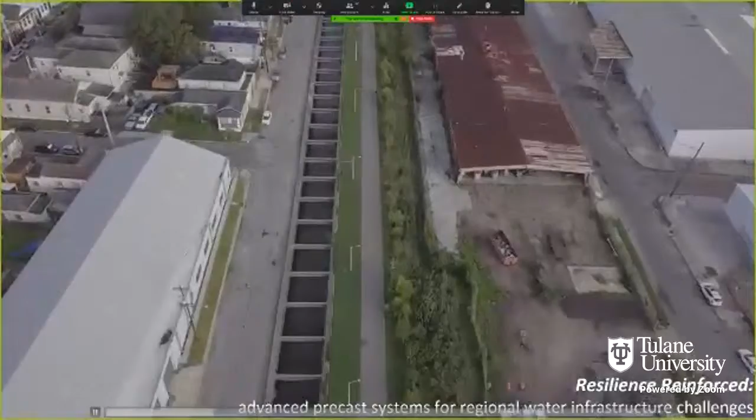Okay, so let me get this going here, and I'll share a screen. One thing is, when I share a screen, for some reason everybody, the video screen essentially is gone, so I can't see you guys, but bear with me. Can you see the moving image? Yes, yes, yeah, good, thank you. Okay, so it's a drone image of the site, but we'll move on here.

Everyone, thank you for joining us for session 2, the afternoon session. Our critics today in the afternoon are Patty Heyda, Associate Professor at WashU. Patty is first and foremost our alum and an urban designer, architect, artist, educator, and author. She studies politics and design in American cities with a focus on contemporary erasure urbanism, displacement, and the normalized processes reproducing intense inequity. Patty's scholarship fuses creative drawing, mapping, and formal design practices with planning, history, critical urban theory, law, and political economy to depict sites according to the reality of forces shaping them. So Patty, thanks for joining us. Thank you, you didn't have to read all that, but it's really nice to have you. And I think it gives everybody the background of why you're here and what kind of things you may be discussing.

So next up is Kevin Centani, Board of Directors at Friends of the Lafitte Greenway. Friends of the Lafitte Greenway is a community-driven nonprofit organization that works in partnership with the city and the community to ensure the Greenway develops into a safe, vibrant, and active park. Kevin is also an entrepreneur, inventor, and hobbyist. For 25 years his company, Controlled Entropy, has designed and produced hundreds of interactive experiences, museum exhibits, trade show displays, and electronic gadgets for clients worldwide. Kevin also has interests including industrial archaeology, New Orleans history, pinball, trains, and infrastructure. Kevin, thank you so much for joining us.

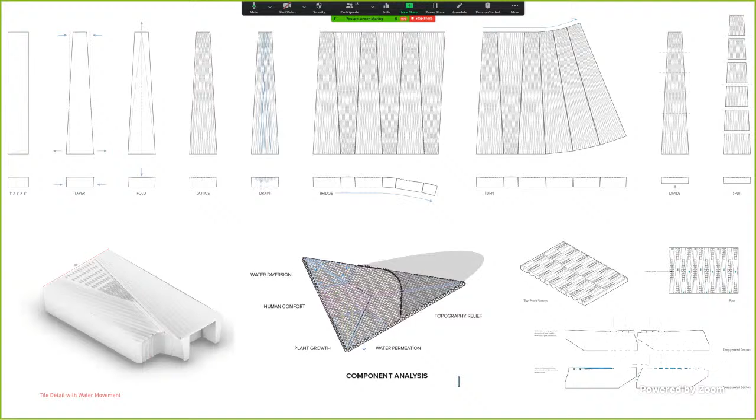I prepared a quick introduction to the studio. Our hunch is that through advanced design and fabrication techniques, the surface geometry of the precast system can be performatively and aesthetically aligned to the flow characteristics of water, mitigating flood and encouraging productive occupation of the ground plane. So at the component scale, the studio pushes the limits of the complex surface geometry that advanced fabrication techniques can afford, and its performative response relative to water.

Now, we've also been looking at the larger context, searching for opportunities to make an urban scale impact. One key data point here in New Orleans: on average, we get about half an inch of rain over 24 hours every 3 days or so.

So the obvious response to the frequent flood events is to, one, increase the size of the drainage system to move more water quickly, or decrease the peak demand of the drainage system by increasing the water detention capacity.

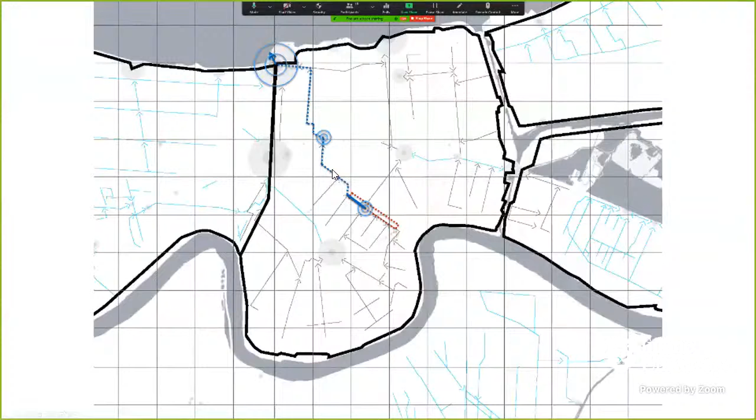The studio took the latter approach this semester with the help of our stormwater management expert, Brooke Morris, who joined us in the morning. We looked at the impact of diverting high flow stormwater from the St. Louis Drainage Canal and detaining it in the northern one-third of the Lafitte Greenway by controlled flooding.

I don't think I need to explain the diagram, but this line in red is our site, so to speak. The canal's right next to it. We're looking towards downtown St. Louis cathedral here, with CBDs in this area. The SWMM model, stormwater management model simulation and analysis, confirms a significant reduction of flooding upstream in the CBD and Lower Garden districts if we take this approach.

Based on the analysis, approximately 450,000 cubic feet of stormwater needs to be diverted and detained to have an impact. This is equivalent to a 1-foot excavation across the site, since the site we're looking at is exactly around 450,000 square feet.

As an example, with a cut and fill strategy, it translates roughly to a 3-foot excavation across one-third of the site, and a 1.5-foot fill across two-thirds of the site. Note that the water table is high here, at 4 feet 6 inches below grade, and the soil is highly impervious.

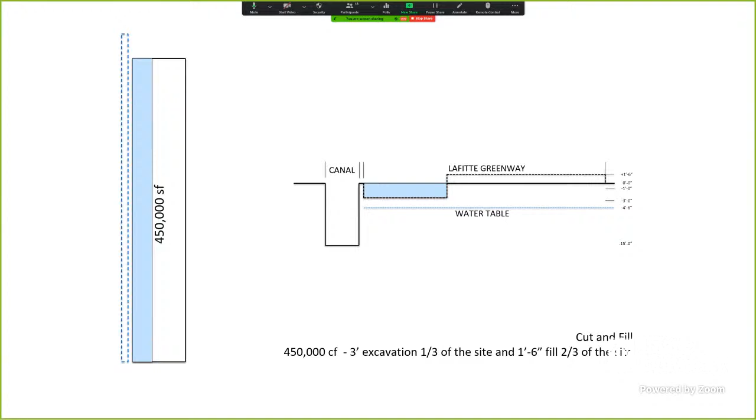And just a little bit about the forebay. The forebay is an infrastructure for controlled flooding, to release the water slowly and evenly in order to mitigate erosion, improve water quality, and promote productive use of the site.

The forebay is responsible for about 25% of the detention capacity, approximately 112,500 cubic feet. It is connected to the canal at 4 feet 6 inches below grade, and the water in the forebay will rise simultaneously with the water level of the canal. The bottom of the forebay is at 7 feet 6 inches below grade, allowing a minimum of 3 feet of groundwater all year round.

So at the site scale, our intervention focused on shaping the surface geometry of the ground plane to manage occasional controlled flooding and water detention, manage normal stormwater runoff and improve water quality, develop the use and increase the value of the Lafitte Greenway for the neighboring community, and explore innovative use of precast to shape the program and the surface geometry of the ground plane.

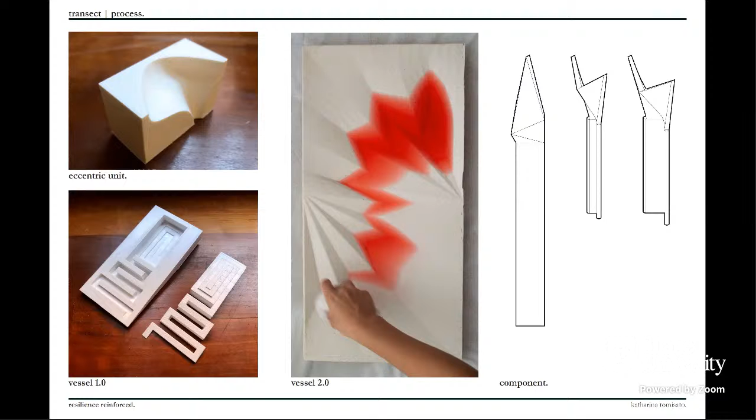We lost you again, maybe turn your video off. Sorry, hang on, let me stop my video. Can you hear me better now? We can hear you, but we can't see your board shared. Okay, there you go. Let's start with the landscape intervention, here's the Lafitte Greenway. Are you sharing the right screen? It looks like it's still buffering. Try again. Can you see it? Not yet. Should I try sharing on the concept board instead of PDF? Sure. Wow, this is embarrassing, sorry y'all. Can you see the concept board? We can't, oh my gosh. Are you sure you're sharing the right screen? Yes, I'm sure.

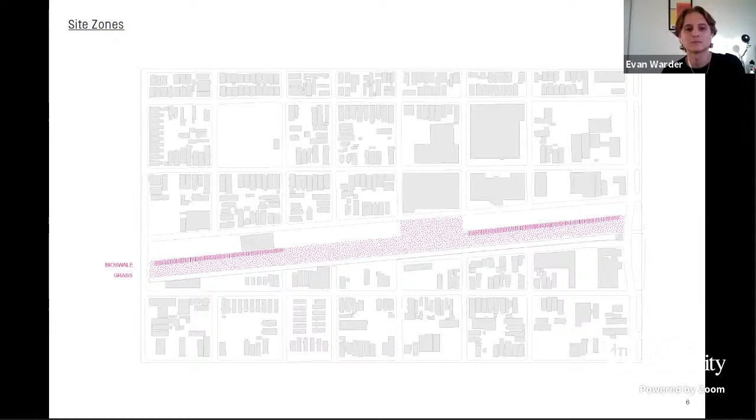So water is just moving through the canal, not stopping, and pedestrian movement is doing the same. The other two aspects, in the most basic sense, there are just two zones currently. One side is entirely public and accessible green space and a trail, and the other side is nearly entirely inaccessible currently due to construction projects going on, but we want to address that inaccessibility. The last issue is the lack of biodiversity and zoning. With the inaccessible construction area, you basically have a grass area, some bioswales, and the former brake tag station, which is now moving to be a shelter, a public spot.

So I'll jump right into how I attacked this. What you're going to see here is the overall approach to the site that I had. The major aspects you're seeing are one path moving across as a bike path, another meandering path that cuts through as a walking path, and those are both wide enough to be flexible for both actually. Then a number of bridges that connect paths and connect people on both sides.

Largely it's around two major aspects: one is the green space and open available areas for people to enjoy as a park, and then these forebays. The forebay discussed previously is to hold water, but my attempt, in order to slow the water down, was to pull the water perpendicular. So these pointing things are the forebays, which pull water out of the canal as it rises, then distribute it throughout the site. I'll explain more as we go.

The basic attempt was to include different ranges of activities. Down on one end, while you do have water retention, you have courts and more open fields for athletic activities and high activity uses.

The center around that shelter, I really tried to create a possible space for events, farmers markets, or a performance area with seating and a nice hardscape, or places where the community can host events.

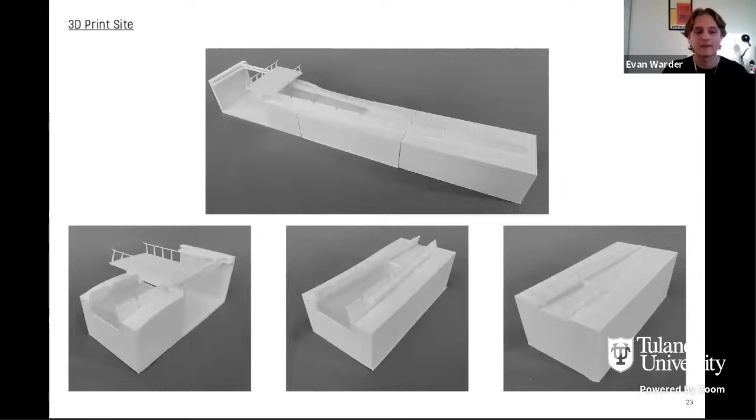That brings me to the fabrication of this piece. I explored through 3D printing some of these spaces and how they worked sectionally and three-dimensionally. Here is the development, 3D printing, more experimenting with how these pieces work. I'll explain it right here.

You have a module of 9-foot and 1-foot modules, about 8'8" and 8'2" tall. The one that's shorter is what's considered your weir, the controlled outflow spot. At low flow moments, that's okay, and as the water becomes more intense, it'll overtake the whole thing. That's why you have a series of ribs, both structurally keeping it light, and also for water overflow.

To make this system a little more interesting and usable and variable, I created a set of precast seat supports that can slide on top of this and fit right in. I'll show you that. They'd be bolted in, and you would simply add wood planks on top. These can go anywhere along the site, in really any configuration, to create benches for people on the site.

The process was we had blue foam, we CNC'd it with a small amount of sanding. This is the unit: I split the forebay into 2 pieces, a bottom and a footing, or top and a footing. This one has 3 pieces, 2 sides and then the top cap, which you can see connected here, and all of them work together. We cast it, and this was before we stripped it.

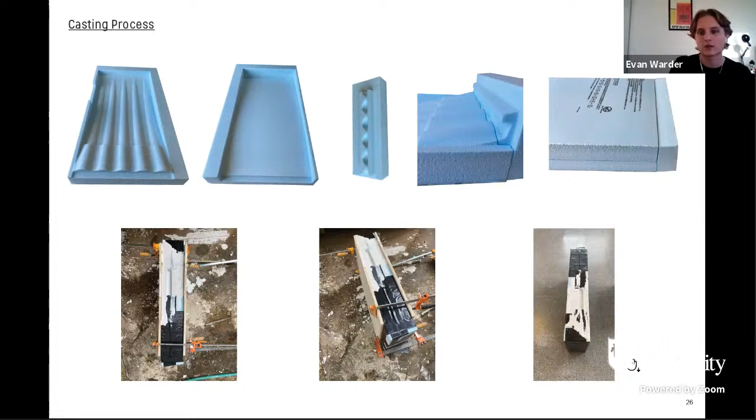This was the bottom piece, a similar process, and this was the resulting precast unit. This is at 1/4 scale, so it's just over 2 feet tall, which makes it not light at all.

Not very realistic, but you see it both without any of the seat supports and also with seat supports that fit in and actually worked well. That ledge helps give support, as concrete isn't great with tension stress, so that gives it a little compressive strength.

A couple more images. You can see how I've slotted it at the smaller scale. That slot actually became very small, but you can see the ridges of how this came together and the markings of the CNC, and how they slotted together and worked on their own. That's how I transcribed it from the large site down to the precast unit, taking from what we learned, and that's it.

Great, thank you. First person always gets lots of questions. You may start with an overview or clarification questions, or you can just step right in and ask tough questions.

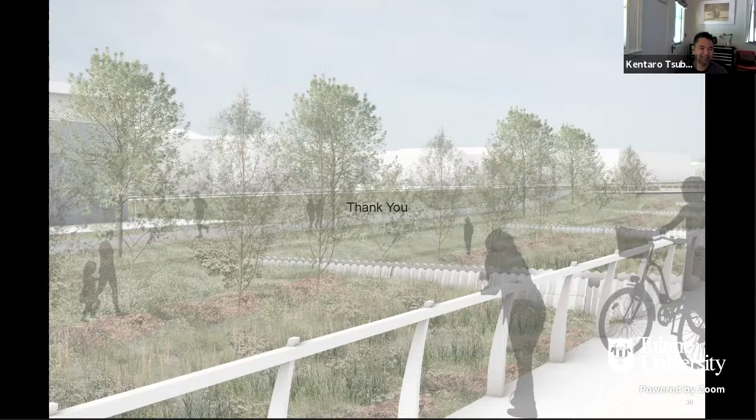I have an overview question. Is the canal where it is now, and was that part of the constraint that you were not allowed to move it? Yes, that's an existing condition, and it's an important part of the drainage system from downtown and the French Quarter, distributing water throughout the whole city. That was in our constraints, so we are leaving it.

I have an overview question too. Is the walkway built on top of the existing canal, elevated now? Yes, it's built on top, and that was something we worked with. A big question was whether it's structurally capable, and we've been told that yes, it is capable of handling a walkway. It's also large enough to bring service vehicles, so if there are issues with the forebay and canal cleaning, service vehicles can use this bridge.

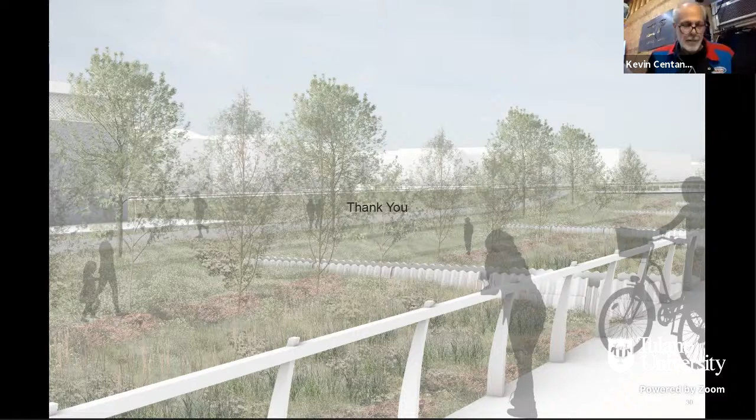Well, it's very impressive, I have to say. I like the design of how you're using the water that's already in the canal. I think that's an interesting take on this project.

Thank you. Evan, can you explain how the water floods? So the water enters and progresses through these spines. When is the moment the water jumps and fills the ground? There's a standard 3 feet, but once it's about 5 feet high within the base of the forebay, it then starts to flood over the edges, and that can continue because one of the big issues is the canal.

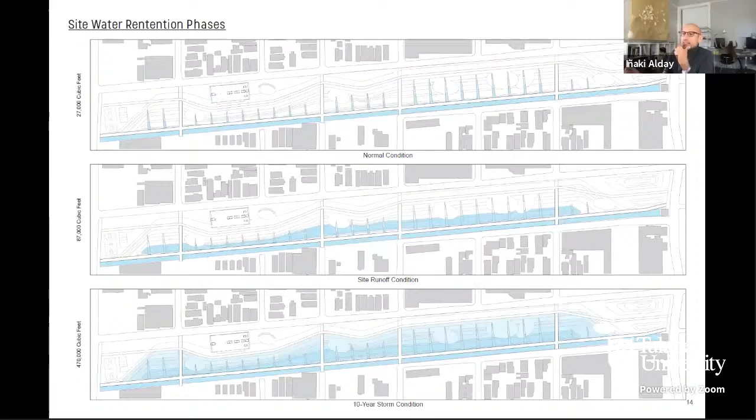And how is it drained? It would drain through a series similar to a bioswale and a pipe to collect the water, which can go back down and then return to the canal over time. The idea is it would try to absorb as much into the ground as possible, but as we know, that's not very much, so it would then return to the canal when the pressures have lowered.

Can you go back to one of the overview drawings, like the larger plan? Yes, here, I'll bring you to the full site. Sorry, I didn't mean to cut you off. No.

I was just going to comment on this, and also the fingers themselves. The contours don't need to be continuous through this plan; for simplicity I see doing it this way, but the nice thing about those fingers is that the individual landscapes between them can all be different. I see a little bit of that, but it could be freer if you wanted. I'm curious why the ripples are on the outside of the finger and not the inside. If it's about slowing the water and dealing with that flow, striations on the inside would help break up the water flow and give it more function. Right now, as rendered, it seems somewhat decorative to me.

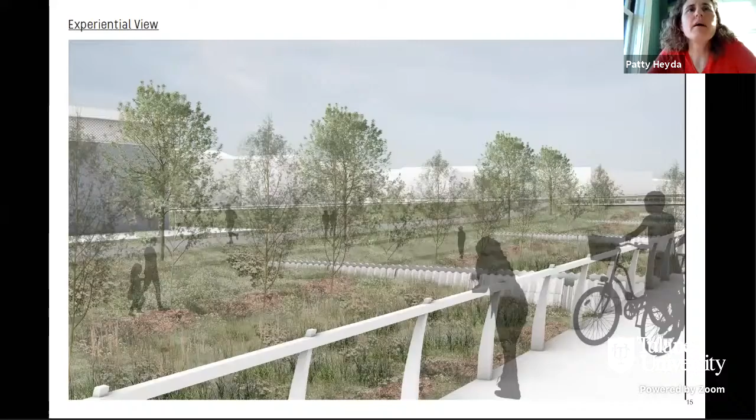You have this really beautiful idea that keeps coming back that has to do with these reciprocal positive, negative forms. At first you showed a study with these bowls, the elliptical bowls, and now the bowls are like these inverse little hills.

I don't know if they need to be bowls, or if you might pick up register more in the city, which looks like you're doing. I love the idea that they're almost like mile markers, that they're registering something. They have such a regularity to them. I think you could take that even further.

The scale of the rib was also a question I had about the actual rib in the system, partly because it looks like when you get those steel tubes that are formed in this way, like they're kind of like culverts that have that ridged kind of side to them, and it might have to do with the manufacturing or something else.

So they sort of read like that at an industrial level, but they also kind of preclude, I guess that's the point, like you can't go in here, or would dogs run through there, or where it gets narrow. I'm trying to understand the porousness of that.

I do think when they're ribbed, it makes it hard to put that bench on, which was mentioned also. I'm just not convinced they need to be ribbed, or could they be ribbed this way? What's the increment, what's the scale of the unit, I guess.

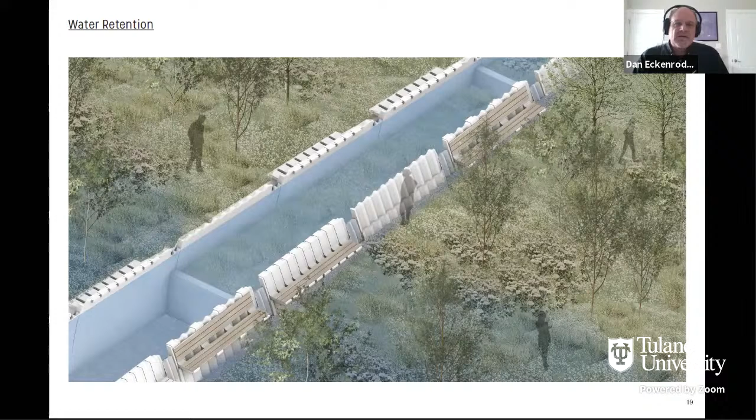As far as the overall spaces in between the fingers and the marshes, you definitely could create a number of different pathways through there. And I know we talked about pervious pave early in the semester—you could definitely use some pervious pave paths to go through that, and it would help drain any residual water that was there as well.

Having said that, I'll be honest—I've been in situations where I've been on 1 acre of land, and the way the designer had the paths working through that acre, with the vegetation, trees, shrubs, screening, it felt like depending where you were at, you were in a completely different area. These paths would meander all over, where you'd think you were walking 15, 20 acres. So there's a way of adding another dimension to what you've got going on there, just by creating some screening between the different areas.

But overall, I will tell you, I thought it was a neat design. I liked your fingers look when it came out and you started explaining how that water was coming out of that canal and into the space. I'm not sure I've seen that before—I thought that was pretty cool. I appreciate that, thank you.

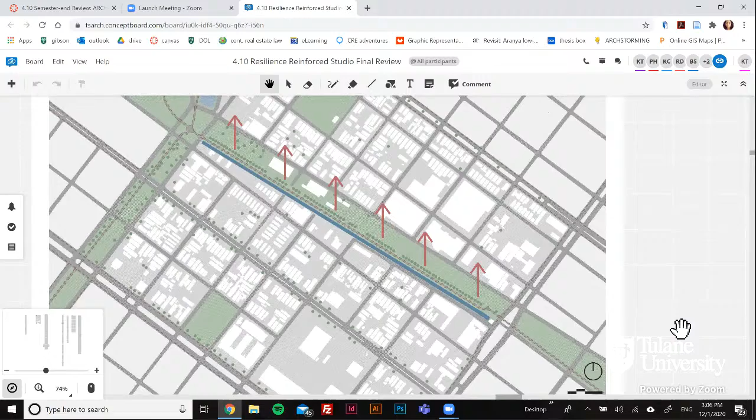I was also really interested in looking at the area in terms of flooding. This area floods very easily, and recently it has taken on a lot of water. So I wanted to make sure this bike and pedestrian corridor was able to remain open even when it floods, and that while the remaining streets are closed off, people can still get from one part of the city to the other.

I was also really interested to see what happened during Katrina. In the Lafitte Greenway, in our particular section, it got anywhere from 2 to 6 feet of water. The interventions probably won't be able to help with an event like that, but hopefully we're able to avoid events like that in the future.

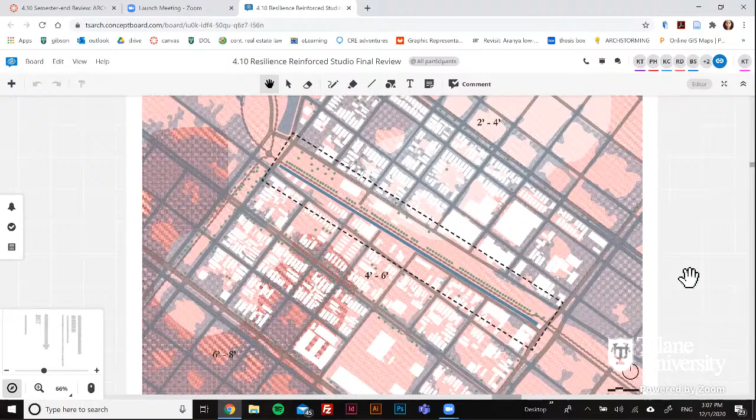The Greenway and surrounding neighborhood are already installing a lot of different risk reduction strategies. In this park, a subterranean water storage tank has just been installed that can hold 1 million gallons of water. There are large drainage pipes that allow this water to first go into the storage tank and then be filtered through into the Greenway. When we visited the site, we saw these caps hadn't been installed yet, but when I went back a couple weeks ago, they had been installed.

They're located at 4 different sections, and in the neighborhood itself, they're installing different street interventions to help slow down the rate of water going into the drains. My main concern with my intervention was to prevent any sort of water runoff from going into these neighborhoods and putting more stress on the system, since that water would ultimately go back into the canal.

So this is when I started looking at how I wanted to intervene in the site. This is the main axis through the Greenway. As you can see, it is long, linear, and there's no deviation from it.

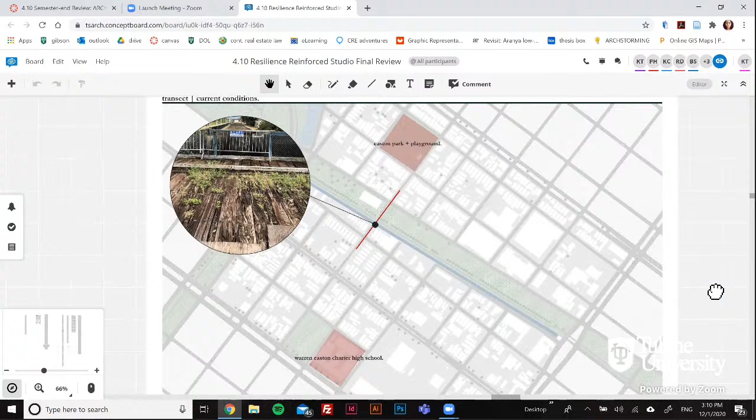There are also two other opportunities for bridges on the Greenway, and these are just very industrial, for infrastructure utilization. To be completely honest, they're not very aesthetically pleasing. So my thought was to add bridges in these three spots, to incorporate these industrial uses and make it a little bit more of an amenity rather than just your backyard drain.

So here you can see the original axis, but then I would want to increase mobility and circulation at these three points. While it doesn't connect at every single street, it does increase the porosity of the actual greenway and the canal.

So instead of just the straight line going through, I'm proposing that we keep this portion of the bike path, but then at this point slowly cross across the greenway, which increases connectivity from each side, helping with mobility.

It also just opens up the space to more people being in more spaces, which definitely would help with safety and comfort being in these places. So while this larger path would be for bicycles, the smaller path here would be for pedestrians, and I'll show how that's differentiated in a moment.

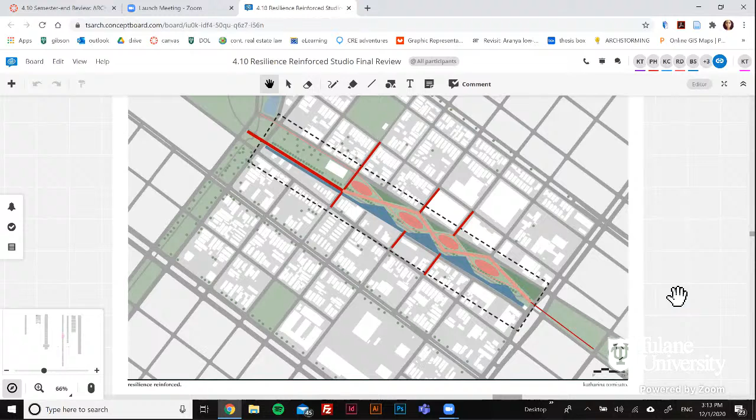So here we have the proposed greenway. This would be it in its dry condition. You can see that while there is water within the canal and within the forebays, the rest of the greenway is very much green, a natural park area with more trees and more shade for people using the space.

This is a section of it, and once again you can see that all of the water is contained within the forebay itself. There's the connection to the canal, but the rest of the greenway is dry and able to be used. Then we see here the bike lane, where we could have either pavers closely packed together that are still permeable, or permeable concrete.

There would also be two bike bridges, or pedestrian bridges, that connect to the official bike lane. Then we would have the pedestrian path, which would be visually and texturally different from the bike lane, more permeable and harder to ride a bike on, definitely, plus the pedestrian bridge here. So we have reestablished the connection from one side of the canal to the other.

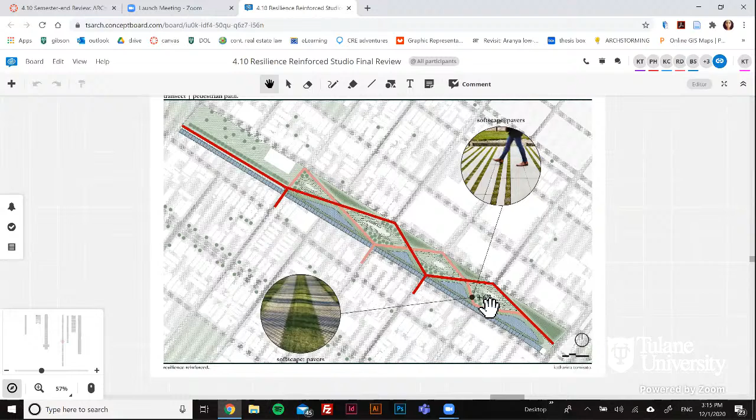This would be the greenway in its fully flooded condition, and I'll show you exactly how much water it's able to hold in a moment. But in this section, you can see we've had the forebay, the water has raised up from its original height, but it has filled up the overflow section. It's traveled through a drainage system into the bioswale on the other side.

This flooded condition can happen in two different ways. The first is overflow, directly from the canal, which moves from the mid-city side to the Bayou St. John side, gradually filling from left to right. Versus rainfall, where the areas with the lowest elevation fill up quickest and eventually reach the same level as the overflow.

So now we go into the capacity. The forebays themselves hold over 143,000 cubic feet, which is a little higher than the requirement.

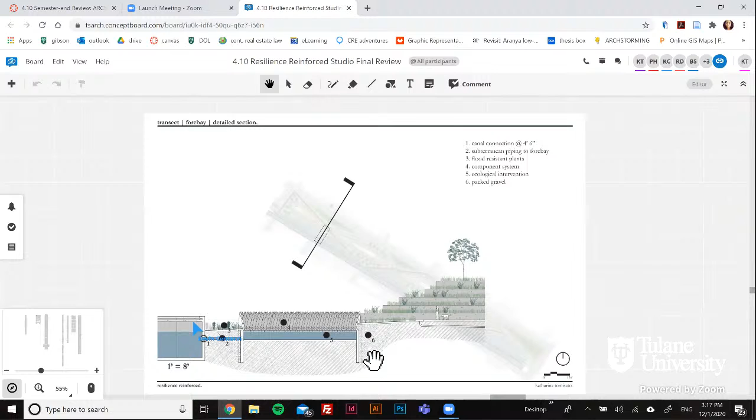Then we can see how the forebays work, where we have a connection to the canal with a grate to prevent trash from going in, a subterranean pipe that brings it into the forebay, flood-resistant plants around the forebay, the component system that makes up the forebay, ecological interventions within the forebay, and packed gravel to help with permeability. Then we go to the overflow section.

Each forebay has its own designated overflow. Once you add all of that together with the forebay, you've got just over 275,000 cubic feet.

Now you have a section showing how the overflow works. At the seams of the components, there are controlled leaks once it hits a certain point, which then goes into the overflow, the original overflow, the slope terrain. Then there's a drain once it hits a certain level, which brings it through a subterranean sloped pipe to the bioswale, and then another drain outlet that has a grate as well.

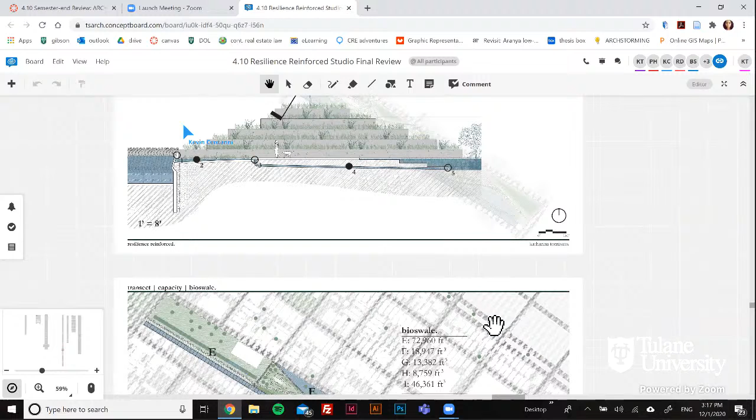This brings us to the bioswale, which brings our total to 435,000, almost 436,000 cubic feet. Here we see a section of the bioswale: the sloped pipe, the drain, flood resistant plants, and a sloped terrace, which allows the water to fill up incrementally.

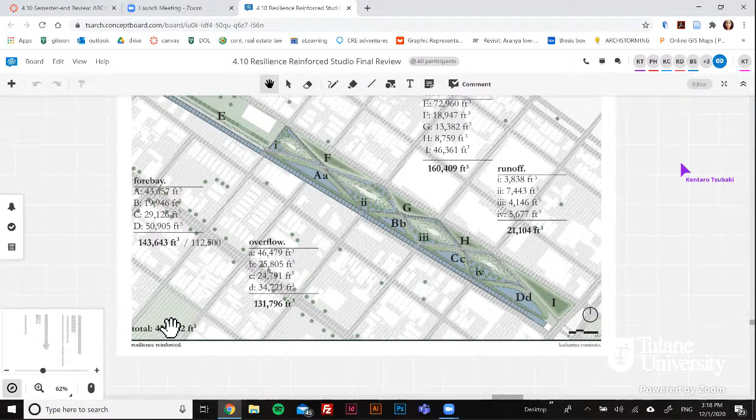The last part of water retention on the site is the runoff, which would be from the mounds. You can see the blue highlighted area, which helps any rain runoff from going out further into the site. That brings us to a total of over 456,000 cubic feet.

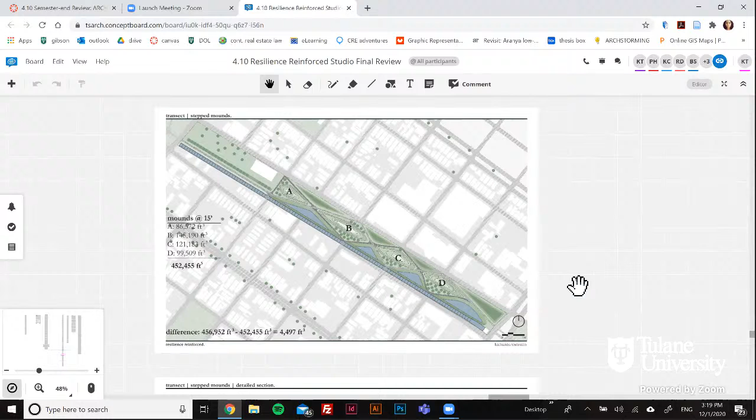So we have the mounds. I guessed at this at first, I just put them at 15 feet, and the volume of those mounds was just over 452,000 cubic feet. There's a slight difference, but you could just add a little more of this dirt to one of the mounds and it would end up covering the additional 4,400 cubic feet.

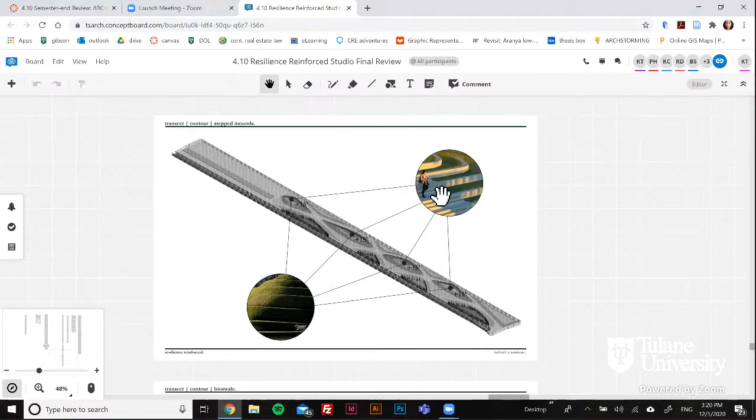Here we see two different methods of how we could build or shape the step mounds. There are options either without concrete or with concrete, but I decided to go with a concrete retention wall so people would have a place to sit along the edges of the different steps.

There are a large number of trees already on the site, so if they were disrupted by this intervention, we could hopefully relocate them and not have to chop any down or bring new trees into the site.

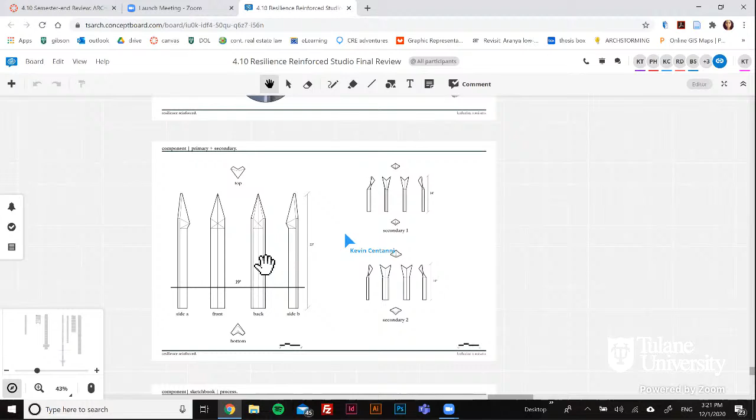That now brings me to my components. On the left we have my actual main component, which took me a long time to get to this point. I went through way too many iterations to get here, but I really wanted to focus on having one main component with a hinge system that allowed for flexibility and the ability to turn, so it could go into a lot of different shapes.

And while I initially had it at 23 feet, when I was actually putting it into the model and into the sections, I realized that 19 feet would probably work. So I just drew that line to show that this is where the 19 feet is, what I actually included in my sections.

And so for the hinges or the seams, I created two secondary components that are different widths and also have different capacities for angling the turn radius, I guess, of how they could be deployed.

I was getting inspiration from joint secant piles, where they have one main component and then another one in the middle that allows the system to curve or go in a straight line. There are also other joints of this nature, like an I-beam or a bent I-beam, but I decided to go with something that allowed for a little more flexibility, in my opinion.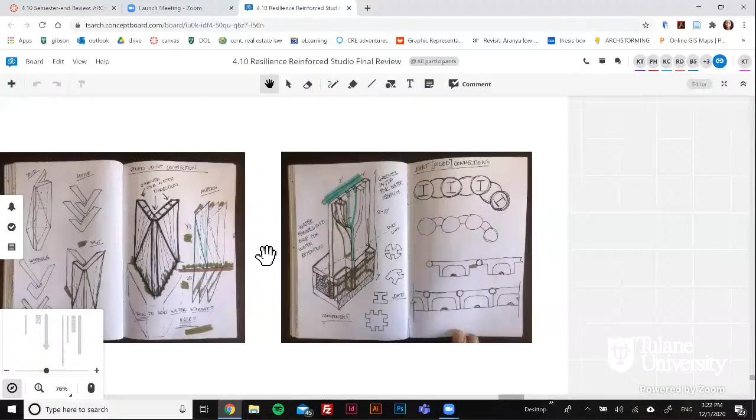So this shows a little bit of how this joint system would work. Sorry, the image quality is so bad, but it fits within the main component, and then it allows it to either go in a straight line, as you can see with these two components, or it allows for enough flexibility that it can even make a full circle and some pretty fun turns, just by having them in different patterns. And then this is essentially it.

Okay, cool. Thanks. Yeah, we can start.

Kat, great explanation despite the challenges. Congratulations, it's clear that you have brought your engineering undergraduate— engineering, I'm kidding.

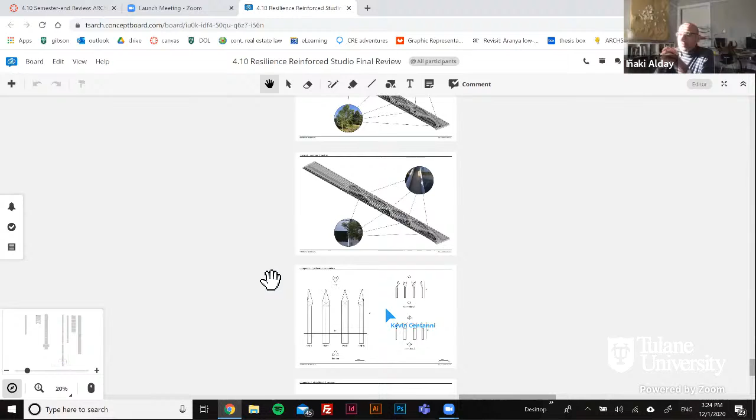No, I really appreciate the rigor and the systematicity, such a clear process. I just want to add one thing: this is probably the moment in which you add a narrative. So you have four mounds, four forebays, and four other spaces, no? And how would you call each of them?

How would you now overlay a narrative of space here? The forebays are not forebays anymore, they are ponds, no? So now we know how much cubic feet they have, but what's their name? And what is the story of each of them? What is the story of each of the mounds? Are they linked to something that happens in the vicinity? Are they a new narrative? Are they places to see something? Are they places to think about stuff? What is the novel that you would now explain? Because the public space also needs a narrative and a story.

And naming is a good way to start the story, no? How would you baptize each of those spaces? I'll just leave it there.

For the rest, I very much appreciate the systematicity and the variations. Maybe in the telling of the story, you could then calibrate a little bit more the decisions of the steps in the mounds. You may not need all around, you may prioritize the steps on the sides where you can take a sun bath in winter, on a day like now, but with very good trees for summer to stay there.

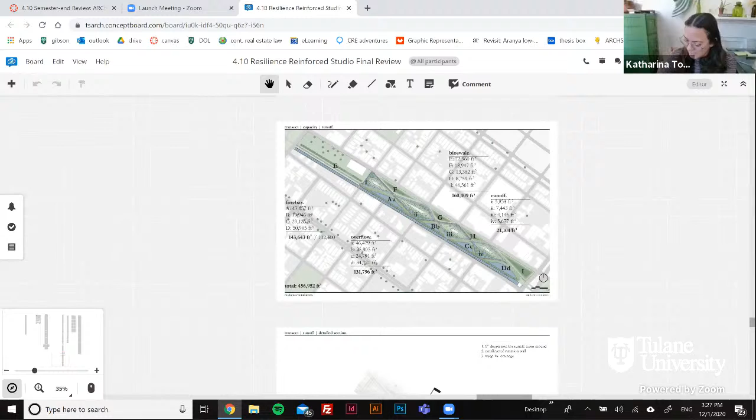So is this the mound of discussions? Is this the mound of meditation? I don't know, you can find many narratives that could help make the final decisions, or is the narrative linked to nature and species, or just to make the last decisions about how you populate and imagine people performing here and enjoying the place, with variations in between these four. You have four variations of everything. So I would love to see the story. Okay, that's really nice, thank you.

I will jump in. I was thinking about that too, because first of all, it's so great to see such a thorough process, such a clear presentation. I love that you quantified it, you're showing that it works. There's a lot of levels to this, and it's a great project because of the way it moves through these scales. You guys are handling this huge difference in scale in a really incredible way. So there's a lot of amazing things.

So my comments are building on that idea. To me, when you got down to the component, the unit, my main question is about its section. I feel like, and maybe I'm misunderstanding it, but I wondered, because you're sort of implementing it like a wall that has this top that opens into these facets at the top of the wall, right?

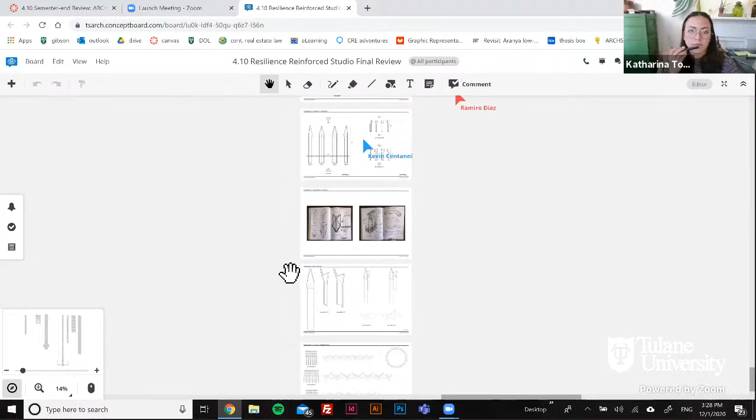As it attaches, I'm really wondering whether it could also have this idea for the facets on the bottom, because there's something you said really early on that was poetic about the first thing you showed with those facets, and you're talking about the light and the water and how they play off together.

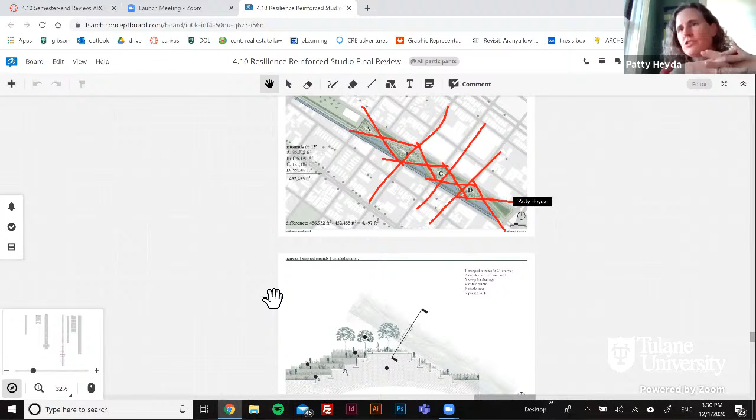And when the water was filling your early model, it was really highlighting the form when the water was present. So I wondered if there was any thinking sectionally about these things that make up a certain kind of edge at the top and make up a section of that basin. That's one question. And in that same regard, if you go back to the plan or section, I thought about the mounds, because there's a tension between the strategy to make an artificial - and I don't mean that in a bad way - this grid is this imposed thing, a very clearly man-made, strong set of lines that you strike across it.

In terms of like, we're not going to pretend it's natural, we're going to stake out these lines, but then it looks almost as if these want to be read in a naturalistic way, the way we can see the kind of topo in a way that looks naturalistic. And I wonder, but then it clearly steps in a man-made way. So I wonder if it has this tension or ambiguity in terms of accepting it's this artificial thing and playing with the idea of the facets. I could see how you might have a nested approach to the facets where, say, the slope is more like that on one side, and maybe it steps to the neighborhood on one side as a big slope. And then on the other side, in the next one, maybe it's doing something else that's funny, or has to do with the football team.

I love that you show the football team goes from here to here, maybe they cross over and have to run up a really steep hill as part of their training. The section of this doesn't have to pretend to be natural, like it's this natural hill in the middle of the very strong lines. I feel like it could just be really strong, like maybe even concrete or this permeable surface you're talking about, because then the very last thing are the trees. And I would love - because that was such an astute thing you said - here's this path and all the trees are on this side and the shadows are going that way. That's just so brilliant. So I want you to close that circle and imagine these facets, again, the play of light and water is what you said, and maybe the trees are planted in a way that you really imagine the light through the trees, and in plan, this play of lines across a sloped surface alone could be so beautiful at the urban scale, and then where you walk, how you walk, whatever. So those are all ways you could help resolve what feels like a little bit of tension in the way you make the actual hills. So I'm just encouraging you to make the hills in the same spirit as you're thinking of the component and the idea of the facets.

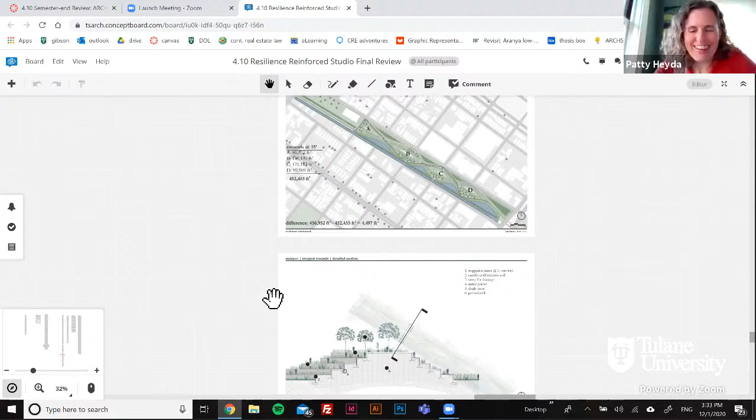Does that make sense? Yes, it does. I'm trying to write everything you're saying down, so I'm sorry I'm not responding. Yeah, no, you don't have to respond. There's a lot to talk about.

But these are actually topographic monuments that are in the axis of the three streets, no? If you are in New Orleans, you don't have any view that has a hill at the end, no? And here you will have these three monumental hills that are the landmarks of these three streets that are interrupted. Yeah, these might be the highest points in the city if it were ever made.

No, I have to say, I really like that too, that there are these three hills, because there are some interesting cityscape views when you go up. People have seen drone photos of what it looks like from up there, and it doesn't take much. Or even nearby, there's that place, the Cannery, where there's kind of a strange autonomous zone of people that live in RVs up top there. Drive up that ramp one day and go get the view from up there. It's quite spectacular.

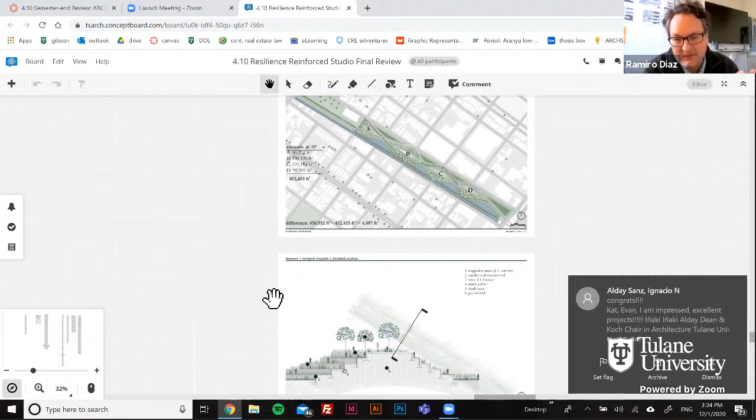Yeah, I think the hills are quite cool, and some of the discussion about the need for hard edges—I think to get a steep slope is why you would do it. There are other ways to achieve that through soil structural methods that are maybe less intensive than concrete. But where you need concrete edges is where you have steps or ramps or other things dealing with a steeper edge. So using that economically would strengthen the design.

But as a diagram, I really like it. I think it's fantastic, and thinking about how people move across that hill, the cross slope ramp against that could be quite powerful.

I think the concrete units, the tessellated kind of structures, are really interesting. I'm having a hard time imagining them—the rendering shows me a little bit—but I'd love to see a view across the water and how they reflect, as stated earlier. I was trying to find an image to drop in of a fantastic arena in Hampton, Virginia, where we're doing a project with the same exact form, but it's a big huge building with that tessellated, folded facade out of concrete.

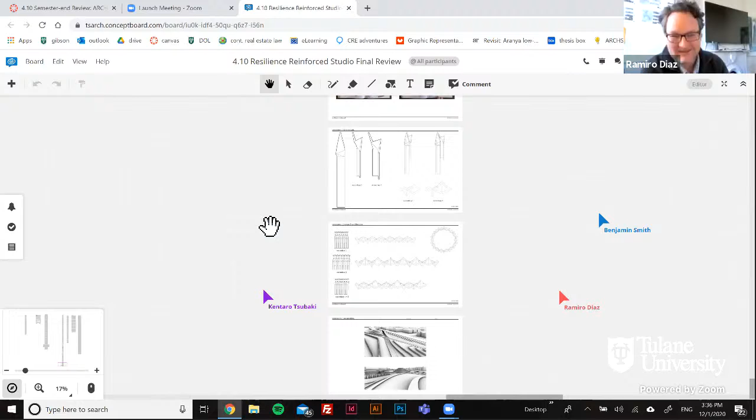It's really quite beautiful—it's called the Coliseum in Hampton, Virginia. It's on a lake, and it's really beautiful on the outside, but apparently not that great inside. Still, it's a really cool feature against the landscape. I'll drop a picture in, I'm looking for one right now.

I'll chip in a few things. I think the analysis is great. I'm probably going to respond to something similar to what Patty was talking about, but I just wish the mounds were more considered. I think they need development—they're not successful yet. They have an interesting approach, but need to be more designed. It's very residual, and with that, I think inconsequential. They could have much greater consequence if more designed. So I think it's a really good solution, but not finished.

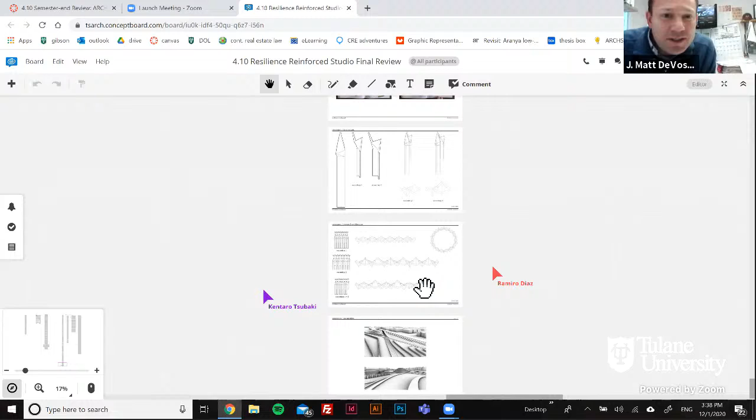But I'm having a hard time—can you zoom in on these pieces? I'm trying to kind of understand. Okay. Wow, yeah.

Well, I mean, the presentation is great. I'm kind of interested—I don't know who the gentleman was that said he's seen a project like this. I'd like to see those photos too. This looks a little bit more elaborate than anything we've tackled at our facility, but.

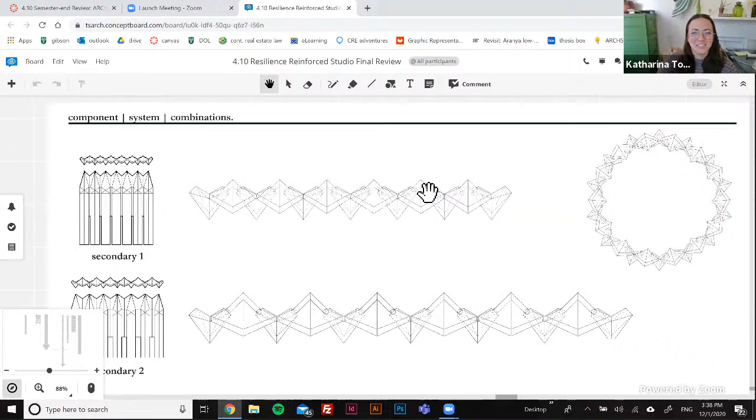Yeah, I wasn't able to actually physically cast these with the hydrocal, so I'm not sure if it's physically possible, just with the curves and bends. But I did try to make sure the base was thick enough and long enough to support it, though it would definitely need reinforcement within it, since these are folded in strange ways. So yeah, I'd have to try it out to see if it actually works.

Well, so maybe a tidbit when envisioning these types of geometric pieces: the industry does what we call cold pours, so you attach and separate castings a lot of times when you have different geometries—sort of like a big tall column with a 3-foot leg on it that's at a 45 degree skew.

Those are generally what we call cold pours - cast separately, then set up, then making a secondary cast. So you start to have to look at the economics of that. Dan and I keep talking about the economics of some of these pieces, keeping the weights down so they're economical to move around and ship. The idea behind something like this is you'd want to get with someone like me in the precast industry on the forefront and really collaborate on ideas of how we could do this and keep it within your budget.

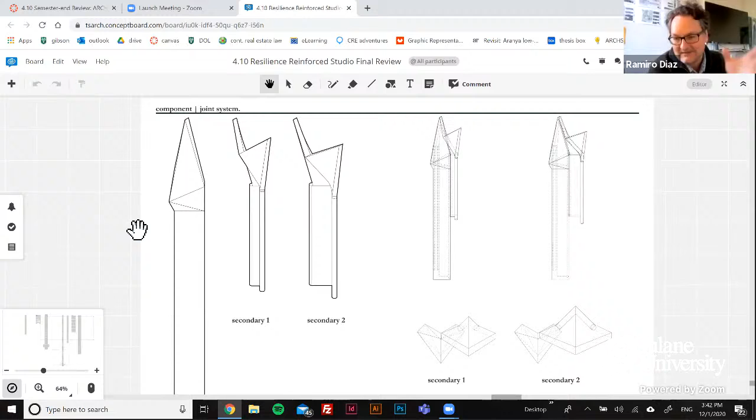I want to add one thing to that - in addition to thinking about how you would cast it, you also need to think about how you would deploy it. Are these driven into the ground, or are you digging out? If you are driving it, you need a place to drive it successfully without it falling apart on top. Or is this a cap on top of a sheet pile? If you imagine a sheet pile that's pounded in, this would be something that sits on top as a finished piece to that system. So the entire thing isn't precast - it's just the part that people see coming up out of the ground related to that.

Okay. Good, all right, thank you, Kat. Yeah, I'm glad I was able to present - I was so scared there for a minute. Thank you all, very good. And I did add a photo of the Hampton Arena, which is an odd building and quite beautiful.

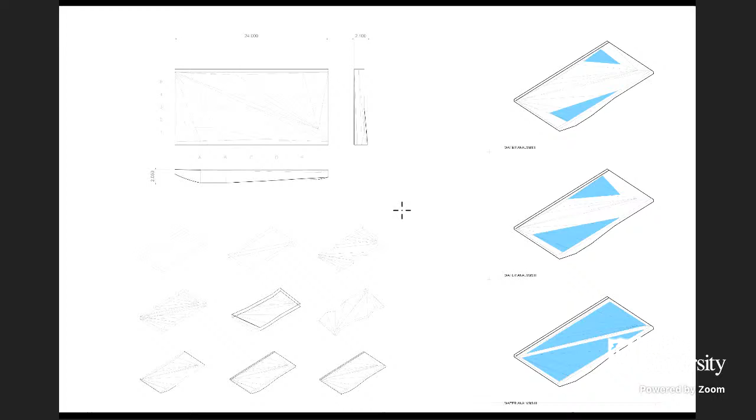And for the vessel, it was more considering how we could capture water and hold it in place for a certain amount of time. The same thing happened here - I tried to understand how, with different planes, I could play with the flow of water and how that would help me concentrate more water in place.

Then going into the Greenway, I was very interested - I'm not from New Orleans, I've only visited twice. So I was very interested in knowing what the people that live around the area do, where they come from, their age, to see if that would help me understand the need for the Greenway. One thing I noticed is that even though there isn't a large amount of children in the area, there is a need for a leisure place.

So with that, I went on into investigating, like as Kat explained, this is more used as a transit zone—people just use it mainly to go to work—and how then you can transform the transportation ways to make this more of a stopping place.

Also focusing on how the site would flood and where the water was coming from the most, and how that would help me understand where to place different components.

And that's where I got to how I was going to tackle the site. The first thing that I thought was to break the site into 3 parts, or 3 components. One was going to be using this existing pavilion that's already there for a marketplace, then a playground, and then a leisure space for the people that are not exactly children playing in the playground.

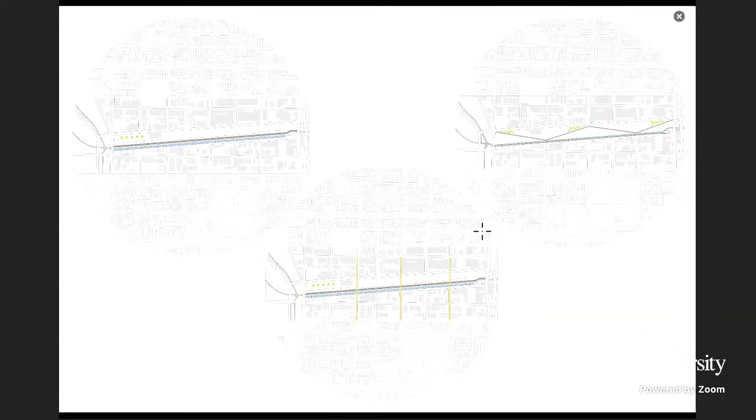Two of the precedents that I looked into were the Cumberland Park in Nashville, Tennessee, and the Promenade at Metropolitan in Columbia, Maryland—looking at how they did different components in a site that was narrow like ours, and how they also played with retention areas and playground areas.

So we get to my site and how I developed it, with the 3 main areas being the market area, the playground, and the leisure space.

Sorry, guys, this is jumping around a bit. So, also how those areas would then help me understand where I was going to retain the water.

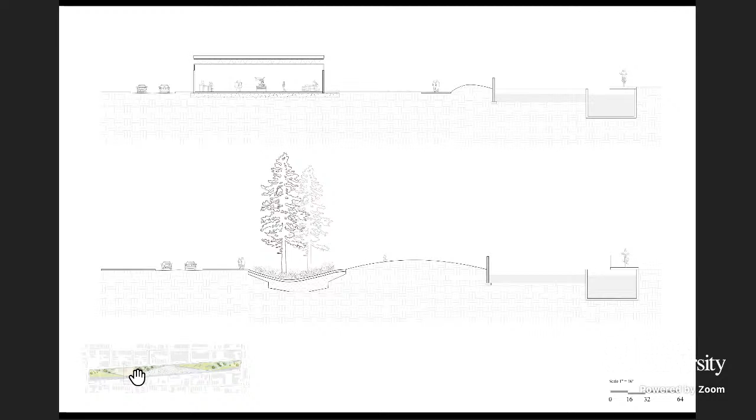Another aspect was that I placed different circulation throughout the site, and I divided it because I didn't want the bike path and the pedestrian circulation to be on the same level, mainly because of speed. So I put the bike lane on top of the canal, and the rest of the paths are for pedestrians.

This is a close-up of one of the sections of the site with my precast component placed in it—I'll explain that later. It's mainly pushed against the bioswales, because that design helps percolate the water into those places.

The design of my precast component comes from the different planes I was thinking of when creating the eccentric unit and the vessel, and how those planes would help move water through the site and pathways—especially because I wanted people to still be able to be on site even when it was raining.

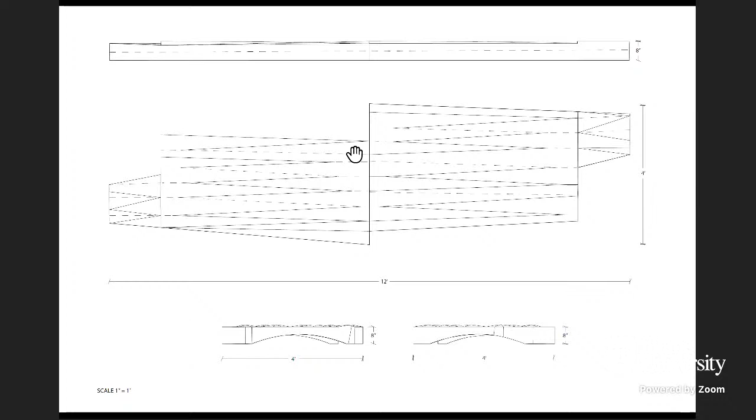And this is how you see how it works near the bioswales, where the pavers would be placed. The idea is that water will zigzag because of the different elevations of the triangulations. Water would zigzag through the individual pavers, and as seen here, it would either go into the middle areas, depending on how much water there is, or go straight into the bioswale.

One thing I did that I'm not sure is right, because I've never done a water playground before, was looking into different diagrams of how they function. One of my ideas was to tap the groundwater to feed water into the features of the playground, but I didn't want that water to be wasted. So in the drainage system of the playground, I have holding tanks that serve to irrigate the different sides of the site that need it.

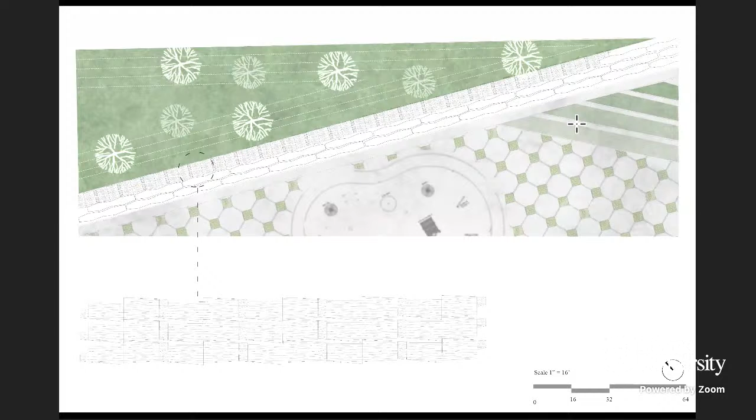Great, thanks. All right, critics.

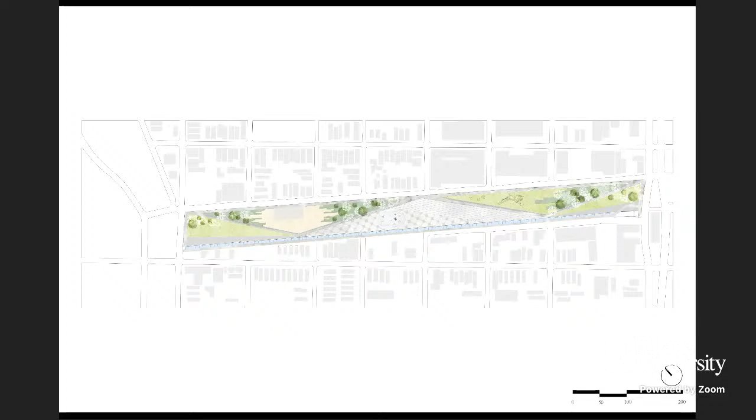I have just a question. What is the average size of a New Orleans block around here? Does anybody know? I'm just trying to get my head around the scale. Your scale says it's 100 feet. 100, 300, I don't know, I'm not really sure. It's about 300, okay.

I'm just curious, trying to imagine this - this is the long side of a block, and your plaza is almost like 4 blocks wide. It's very monumental. I think your drawings are really nice. Just trying to get my head around the scale, because I guess that's your whole water retention area, right? And these are houses - we haven't really talked about the city fabric yet that much, but some of these houses literally look out over this.

Oh, her internet went out. Oh, no wonder, it's quiet. Okay, I'll just wait.

Well, to answer your question, it's about 300 feet per block face, so the module is like 330. So you're talking about 1,200 feet long. Okay, so a New Orleans block is like 300 feet. That's helpful to get your head around - block is a big area. And the typical house lot is about 30 feet wide, so those houses are about 24 feet wide each if they're double shotguns.

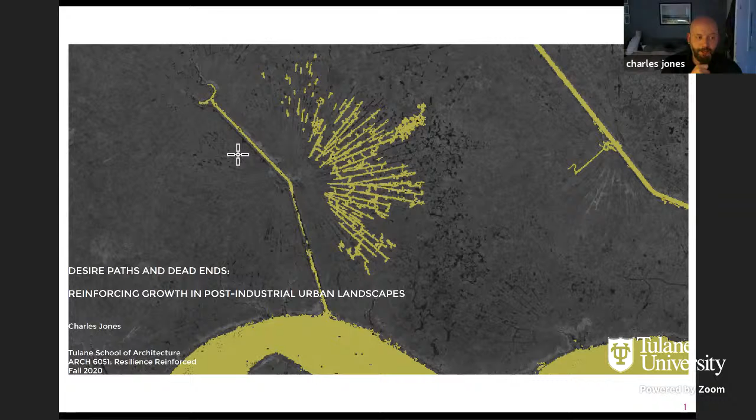Thinking about this and producing a couple more images, I think a lot of the pressures are at the edges of these conditions. Paths are created typically in very efficient manners, whether it's water or people trying to communicate or mobilize. But the pressures at the edges are quiet but also intense. Similarly, interstates are cutting through the swamp now.

This created a lot of dead-end conditions historically, but the canal itself fell victim to its own phenomena, in a way, where a new canal was created that didn't have to fuss with the winding nature of the bayou. That much more efficient path started to be used for transporting resources and navigation in and out around the city.

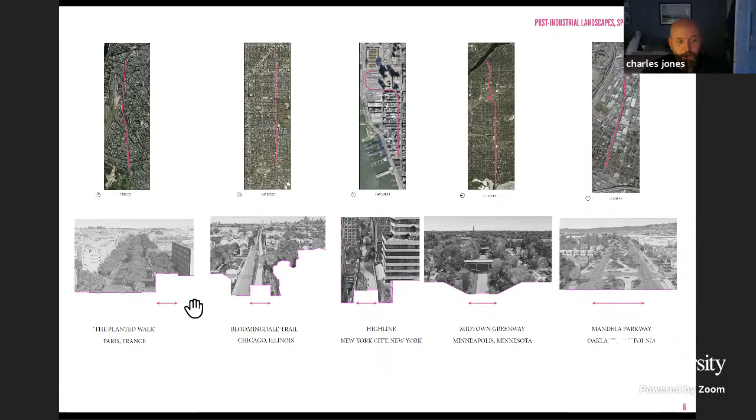I think the interesting opportunity with the Greenway is that, while a lot of people have talked about it being very confined, relative to a linear park, the width is quite substantial. A lot of these post-industrial linear parks, which were railways, are anywhere between 30 to 60 foot wide.

Whereas the Greenway, for over half of its length, is an average of about 180 foot wide, and I think this kind of allows for a high level of productivity, as well as ways to activate the landscape through how people use it.

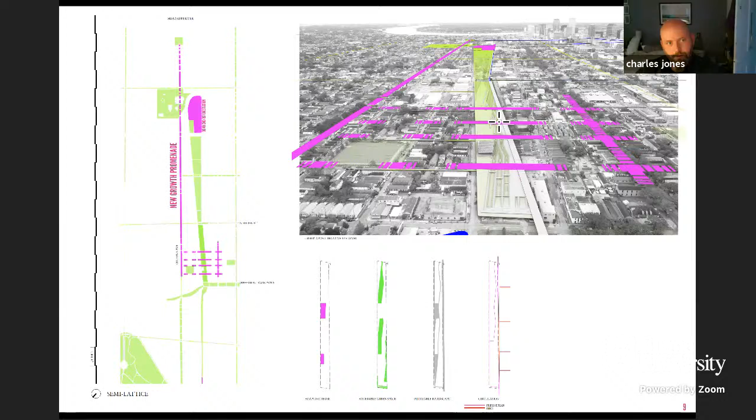So with the strategy for water management, and also the manufactured topography, the idea is to use those rail lines, the spacing of those rail lines, to establish a formal set of channels or canals. I think that's an acceptable vernacular, that start off in parallel but basically collapse and disperse towards the broad end of the site, in this direction.

And so water is mainly entering at high peak flood conditions, entering at this end of the site. The forebay is essentially kind of like an exposed system that would need to be routinely maintained, but I'm also suggesting that's kind of a celebrated quality of the proposal.

At those high peak flood periods, once maintenance needs to be performed, the bridges that allowed for connectivity across the site become disconnected. You can see a diagram here that's segmenting these pedestrian bridges and allowing them to move across the open forebay spaces to service and maintain them. So that's kind of a recurring thing, elevating the visual quality of it and building in that ritual to the site, knowing it's something that's going to have to be done frequently.

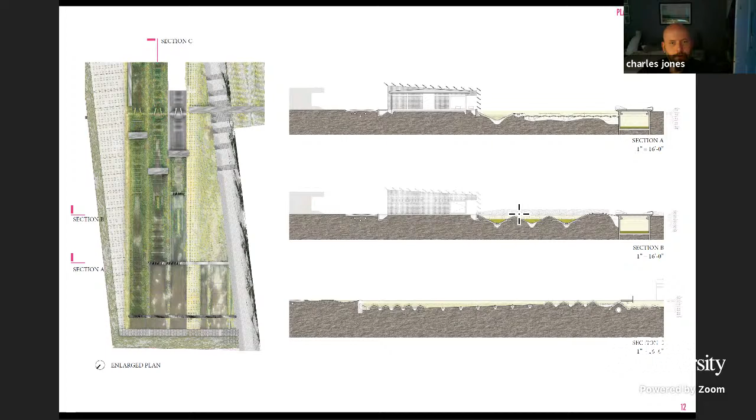Haven't rendered in a long time, but took some time to have a physical site model milled just to try and capture what it would look like in a flooded condition, experimenting with sand and fine mists to see how things would settle over time.

These are just details of that, looking at some of the different microtopography explorations, and then these more vignette-like views at the points of those bridge crossings.

Looking a little closer at the forebay canal armors, I developed this further to have a subtler texture that suggests another level of sediment collection and energy dissipation. We have some pretty awesome tools now.

This is a plugin for Grasshopper that allows you to simulate water flow. You can pick sampling points, and it shows what happens if water is falling straight down and the path it moves. These are three different levels of resolution, and with these inverted points, the vectors start to really collect in those areas.

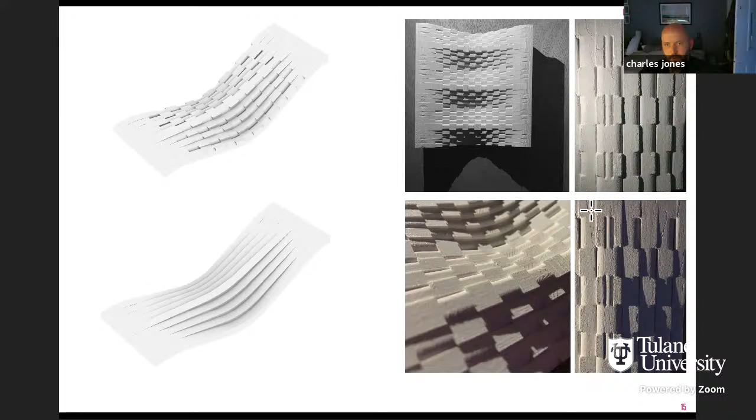For the design of the elevated pathway over the canal, I'm proposing that's essentially a pre-stressed hollow core slab, and thinking about the guardrail condition as a deep semi-lattice, because the canal is so wide — about 24 feet wide. So you can have a deep edge condition while still maintaining a 14 to 16 foot path for 2 lanes.

And then the last idea here is to think a little bit more about the process of hollow core slab construction, because it seems like there's always a topping slab poured on the hollow core afterwards. So I'm trying to think about ways to eliminate a step and introduce a texture.

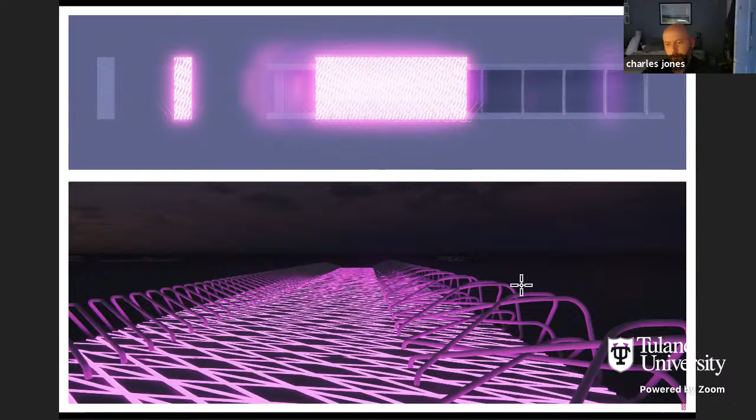It's typically extruded, so I'm proposing that large scale stamps can be used to roll over the surface of the slabs as they're curing, which can then be post-processed. The idea is that you could swipe in some materials that could help with using UV light for illumination. So here's my radical idea for being able to inject something into the surface that allows for a more uniform illumination at nighttime.

And that's it. Cool. I can go back at any point.

Well, Critics? Charles, I guess I'll start. I'll comment on the precast side of things at the end. Certainly, go back to the hollow core. So obviously you've been to a hollow core plant before, right, Charles? I guess. Yeah. Can you hear me?

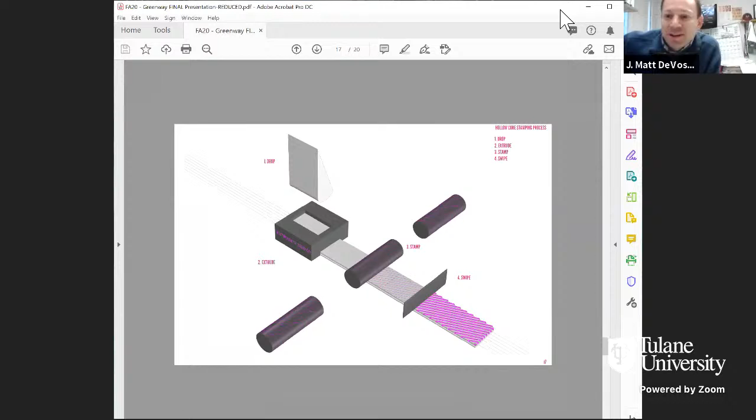Yeah, so interesting, I like your idea. Interesting enough, and maybe Dan's not aware - the Boykin brothers, who are part of the PCI Gulf South, did the sound barriers as you enter New Orleans. The stamped sound barriers, their concept behind that was wet cast, not hollow core, but they actually had a machine that stamped the back, sort of almost like a wave. So similar to your concept, it's been done before. It's interesting that you brought that up. But very, very interesting. You're the first person today that has brought in hollow core, which is a very economical solution to what you're trying to do.

So very interesting. So describe the process after the stamp now. Well, the idea is that if you create a deep texture, that's not conducive for certain types of travel, or potentially accessibility. So the idea is how could you then infill that so it's closer to being smooth again, but the material is different - the same way you would ink etch or something, that's the idea. Yeah, okay, cool. I like the idea.

Just a quick note about the precast - we looked at a similar approach when we were doing the Lafitte Blue Way design, because the Sewage and Water Board said we could cover it, but you needed to be able to remove them so that if they needed to pull a car out of the canal, they could do that. So that was the one input from the Sewage and Water Board, that they agreed covering the canal was feasible, as long as it had access points.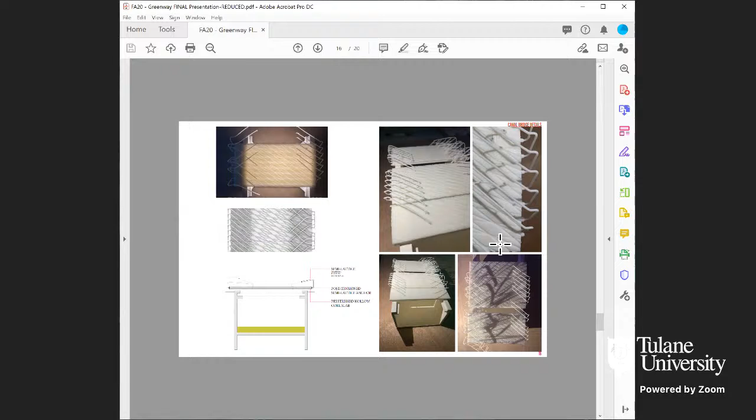So doing precast panels there makes a lot of sense. I was going to ask for a little more clarity on the bridges thing that move. It's the idea that there's rails, and then almost like gantry cranes that move across. It's a little underdeveloped, but the big idea is that it's revealing the maintenance process, foregrounding the maintenance process when it's happening. So the way it would work is the ridges of these would have tracks in them, sketched out, but I think these are hollow core slabs in the other direction. The idea is that you could basically ride on one of these - they're 15 feet wide, 30 feet long by about 8 feet deep.

So that's the idea, that personnel could basically move over and use that. There may be some other rigging system used to retrieve or vacuum, but the idea is that the path is broken in these extreme conditions.

Very, very interesting proposal, Charles. And I like the way everything is very concrete and industrial in those ways. I think that's an interesting use of that space in that environment.

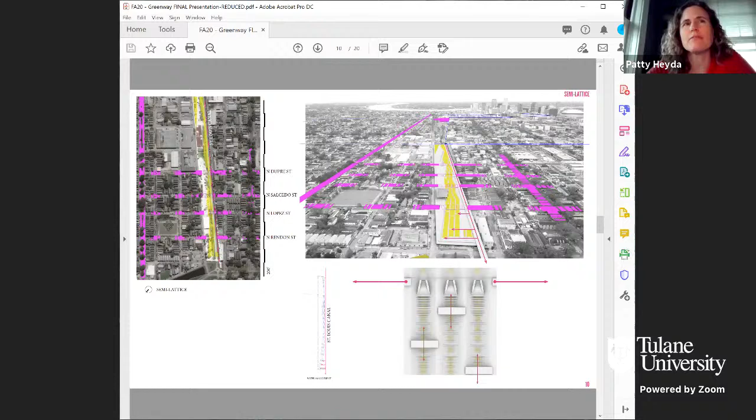I was going to add, I jumped straight to details early, but I appreciate the larger view of the city and the history, and the perverse upside-down plan where you put the French Quarter at the top of the drawing. The history of this corridor as the place that all the logged trees were carried down from the middle of the city and the swamps to build New Orleans - I think inverting that and making it the corridor for reforestation is quite interesting.

I do wonder though, the little trees make sense here, right? But the big tree - growing the trees to a larger scale would make sense to me, or the sort of large scale planting and where they're going to end up in the future would be maybe somewhere else in the city. So maybe thinking again, another level of diagram of where the places around town that this would benefit, the other sites, the empty spaces in the city that we could reforest.

One of the reasons why we have so few bald cypresses in the city is because they're effectively banned. You can't plant them in the street because their knees tear up the street. So pond cypresses people plant in the streets, but I planted 3 bald cypresses in my backyard, and the vessel that I have for water storage is intended to be a little nursery for cypress trees. We just haven't implemented it yet, but they can live in vessels, right? They can be in an oil drum for a while, or a 55-gallon barrel. So I was kind of surprised from your narrative that's not what you did with your concrete thing, as the vessel for growing the trees, or for holding them on site, because the trees themselves can be considered a module.

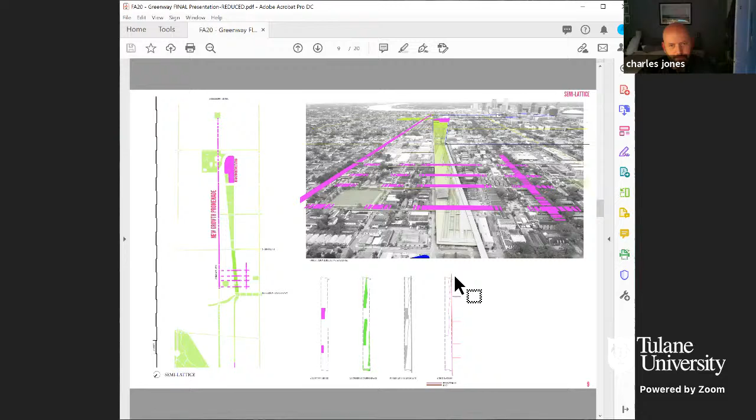How do these adjacencies work? Sure. It essentially coincides with these 4 street intersections, so there are 4 points about a block apart that allow for connectivity. Other than that, this path is continuous. In this diagram, there is a path that moves through the center of the space along the edge, and the idea is that the lawn is more of a flat, programmable, functional lawn space. Then there's just another continuous circulation route along the perimeter of the site.

I think one of the other layers is just that idea of desire paths, which seem to be a nuisance in traditional park planning, where people are going to do what they want. So part of my thought was to focus on really 2 primary circulation armatures, but then there would be a lot of flexibility beyond that. So, is it possible to walk in between these fringes?

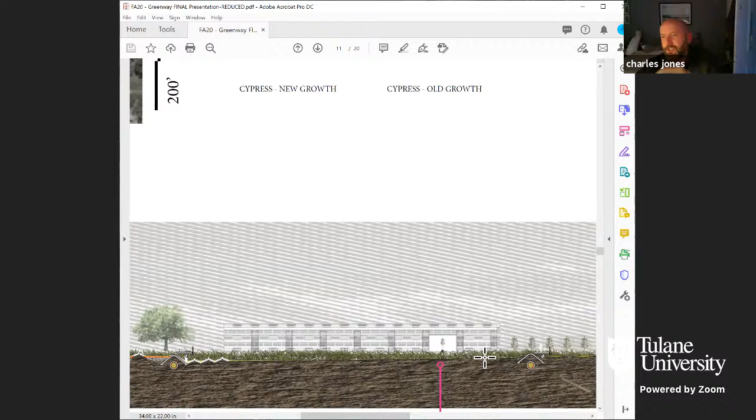Towards the back half of the site, yes. It's hard to tell, but it's wetter on one end of the site and it's incrementally stepping up. So really, it's just the first third of the site which is probably typically wet, but the rest of the site takes that same language and eventually becomes a positive condition. So yes, you can circulate through slightly drier conditions on the back two-thirds of the site.

Yeah, I was just wondering if people could interact more on the wet side as well, but yeah.

Is there a chance or not? Because you have this microtopography that allows you to control the swamp condition of that area in a geometric way, no? Well, I guess part of what I'm arguing is, how much—if 50% of the site is accessible, is that enough?

Like one of the things I am preserving is a paved hardscape extending out from the brake tag station, knowing that would potentially function as a market. And I guess I'd take the position that needing to move out, this is going to be wet and kind of yucky, and it's going to have a good bit of trash in it from time to time. So I'm kind of arguing that I'm preserving this portion of the site to not be occupied by humans, because that's the beginning of that manufactured wetland area. So for viewing pleasure only.

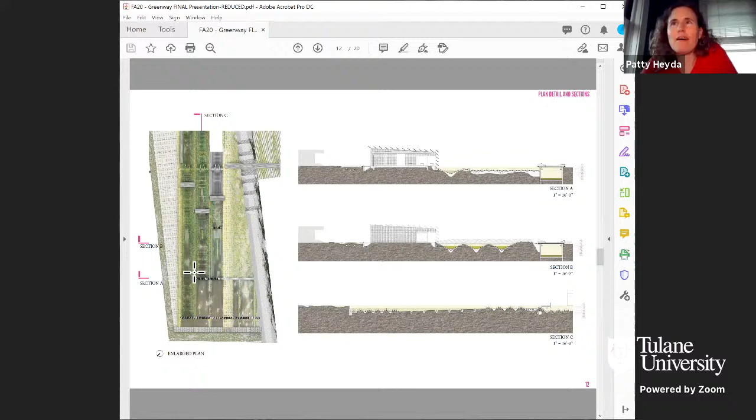So there are different animals that go to different levels of the water, some might be flushing through, some might actually live there. I don't know, I think it would be interesting to think about, because you have the cypress trees and you're taking a longer-term ecological approach—to think about, is this some sort of habitat for anybody? Or shouldn't it be if it's not?

Yeah, the larger fundamental question here is, is it connected to the bayou as a water feature that has permanent flowing water and is a natural system, or is it just a stormwater reservoir detention basin that the water leaves after a short period? Because you really don't want it to stand for more than 48 hours unless you have circulation moving through there. The canal that's there always has water in it because it's so deep.

It has groundwater in it all the time, and you occasionally see ducks and minnows and creatures down in the deep one. But I think when we connected to the bayou in our scheme, you had to go down maybe another 5 feet deeper than what you guys are proposing. So you can easily connect to the bayou and use that as a source and have a cascade, where the water is flowing in always from the bayou, which is what we were proposing.

All right, anybody have any sort of ending comments for Charles?

Good, thank you. No, okay. Go ahead. I was just going to ask what's next. I mean, I know like your thesis.